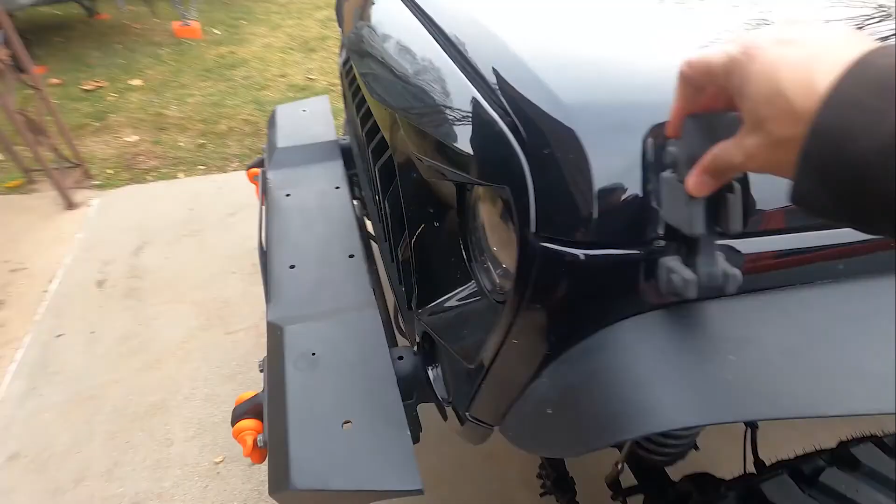All right, we're back. This time it's a little different. We're not in the freezing cold in the elements outside in the garage, especially since right outside my office here we got close to 8 or 12 inches of snow over the last 36 to 48 hours. I don't really want to be out there in the negative temperature right now, so we're inside the home office.

We're hammering through some details, and I need your help to make a decision. The decision we need to come up with is: do we want the airbox to be on the driver's side or the passenger side? I don't have a preference, I'll go either way. I'm not sure what option is best. I don't know the pros and cons to each one, or the element of work that goes into each one.

What I'll do in this video is lay it out for you, and I want your feedback. If you've done this before and found one way easier than the other, or if you're researching it yourself - a lot of people have reached out about the different elements and parts for this Hemi swap, and this also applies to the 5.7 because the 5.7 and 6.4 are extremely similar. I'm going to use some creative computer stuff to overlay my screen so I'm still a talking head in the corner. But I really just want advice. I don't know the option. I'm going to lay everything I know about the scenario out, and I'm leaning one direction, which we'll talk about at the end of the video. But let's get right into it.

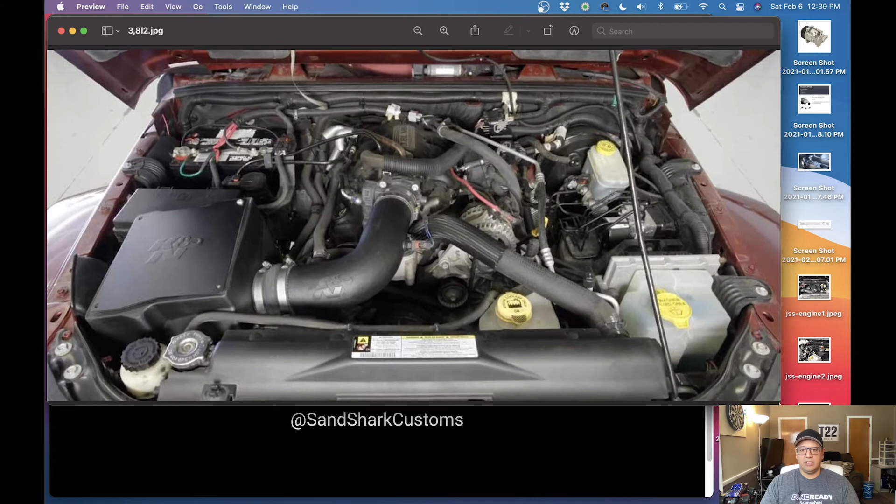All right, so let's first start with what the current 3.8 engine bay looks like. This is a current 3.8 engine bay that has an aftermarket K&N air filter intake. So let me get this set up to edit. We got the intake right here, the battery back here, the TIPM right there, the power steering fluid down there, the radiator across here, the overflow coolant bottle right there, the brake fluids right there, the computer that sits right here, and the windshield washer fluid right here. So bone stock 3.8 out of the 2007-2008 Jeep JK - it is on the passenger side where the airbox is.

So with that said, we know that in the new Hemi swap we really have two options. We have to relocate the washer box over here, and the overflow box most likely to this side, the passenger side, in order to get the airbox to sit over on the driver's side.

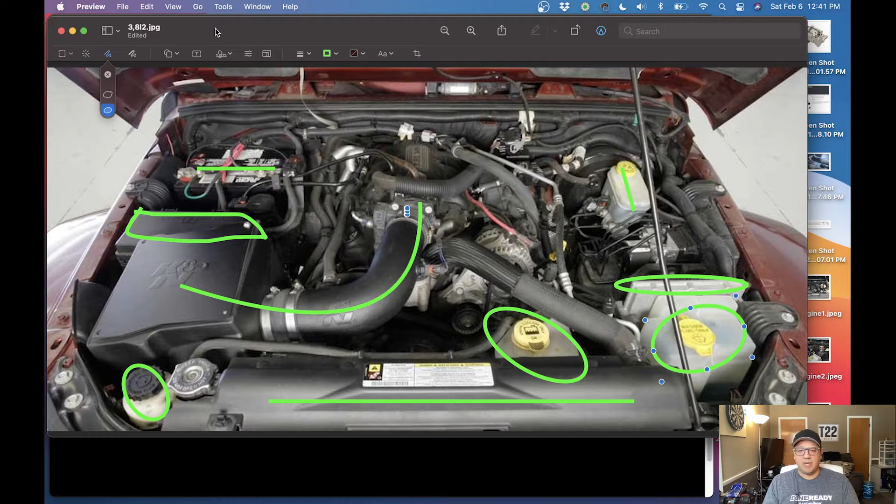All right, so let's go look at a couple of the swaps from other companies out there. We have AEV that does engine swaps, we got Jeep Speed Shop, we got America's Most Wanted, we got Dakota Customs - all these. And I'm sure there's other shops I just don't know about that you can get kits from. I would love to know other ones because I want to build out this resource. So if you know of other shops that do a DIY kit, I would love to know more about it so I can document it on our webpage. Throw it in the comments below, or message me on Facebook, or reach out on Instagram.

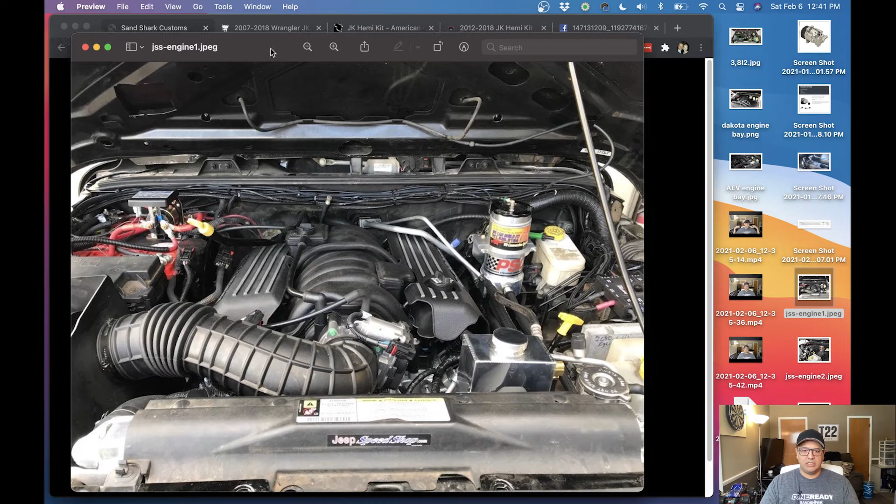All right, so let's go ahead and minimize this screen. Let's start with Jeep Speed Shop. So this is the engine bay of a swapped 6.4 Hemi in a JK. And we can see right here, let me get my marker out, that the airbox is over here on the passenger side.

Okay, so what is the difference here? We know that it probably has an aftermarket power steering pump or reservoir pump. I'm not very familiar with this setup, so I'm assuming that's the power steering. We have the overflow bottle right here, we have the computer, and I'm guessing right over here in the corner is the windshield washer fluid.

Now, what is different about this engine is the intake manifold. A stock intake manifold from an LX style 6.4 Hemi or 5.7, the front of the intake manifold comes out and shoots left, and then you have the throttle body right around this area. This, I believe, is a modified intake where you send them your intake as a core, and they modify the front to have it come straight out, so you can put the throttle body on it, and then this hose or pipe can come off the throttle body and go to the passenger side airbox area.

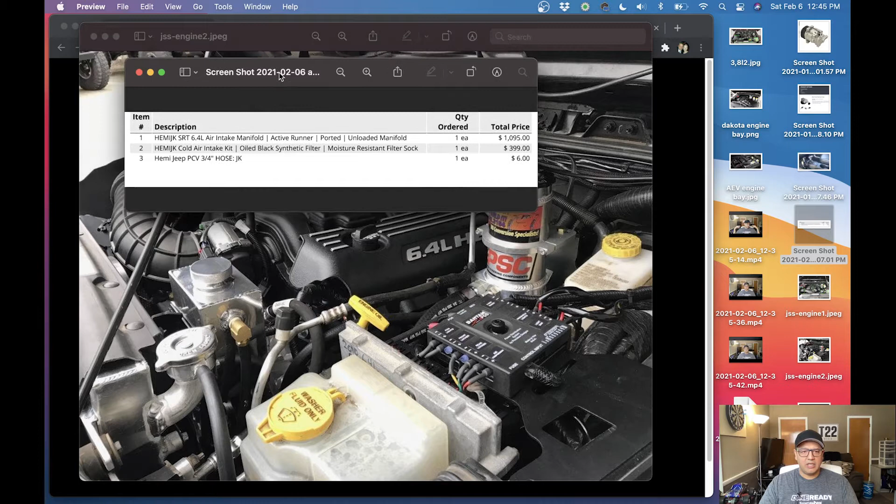And while we're talking about that, let's look at some numbers from America's Most Wanted. So I reached out to them, and they're right down the road from me. I'm in Grand Rapids, Michigan. They are just outside of Detroit, maybe a 2-hour drive from my house. I also learned that AEV, who also does Hemi parts, and I'm sure everybody's heard of AEV because they offer tons of stuff, is also just over in Detroit too. So it's kind of cool to have two big companies right in our neck of the woods.

So let's look at some of the pricing here. The challenge with keeping the airbox on the passenger side is that you have to have a modified manifold, and that is a little bit of a scary price tag. You can see right here from America's Most Wanted, they want almost $1,100 for a new manifold. I don't know if that's reduced with the core charge of the manifold you have or what, but man, that's another $1,000 price tag just for an intake manifold that you may already have with the engine you bought.

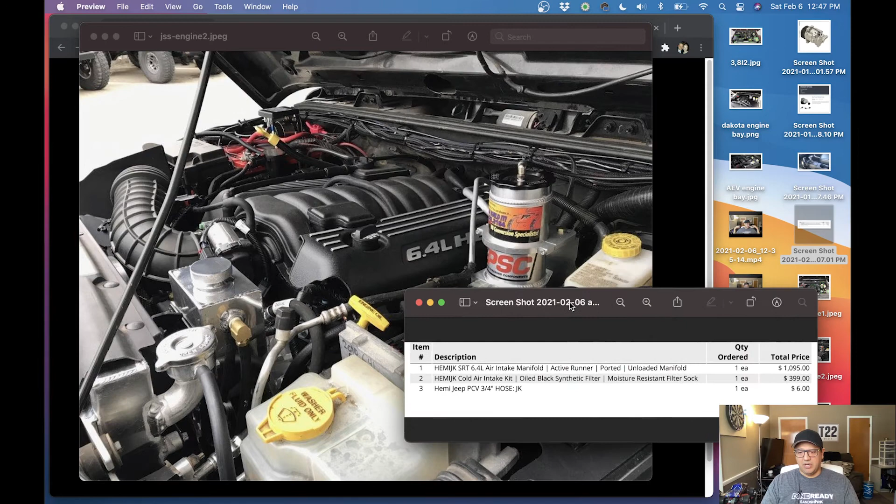And then from there, you can see that we have the cold air intake. That's basically just the filter, the actual air box, and then the tube that connects up to the line. And they also threw in that I would need a PCV hose to make sure everything's connected up properly. But man, that's a pretty hefty price tag to do the intake manifold modification. So let's keep that on the back burner. I know I don't necessarily want to dump that kind of money on there if there's another option.

So let's go over what that other option is. What we can do here is minimize this.

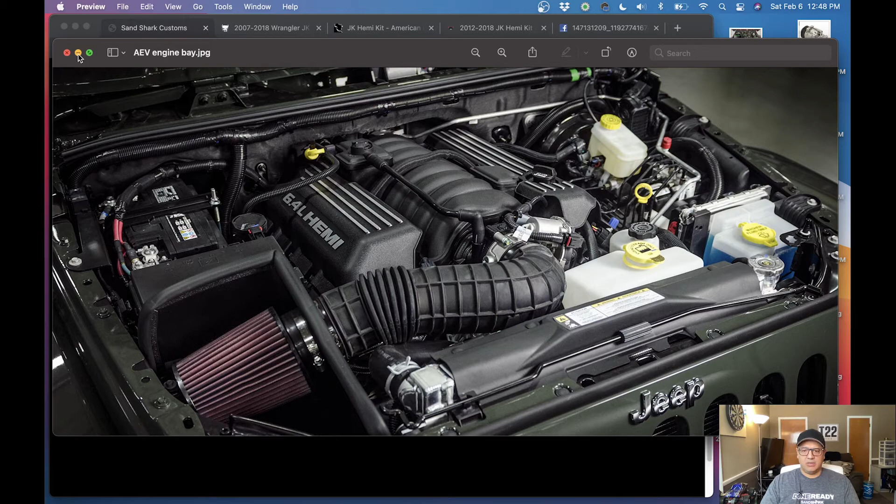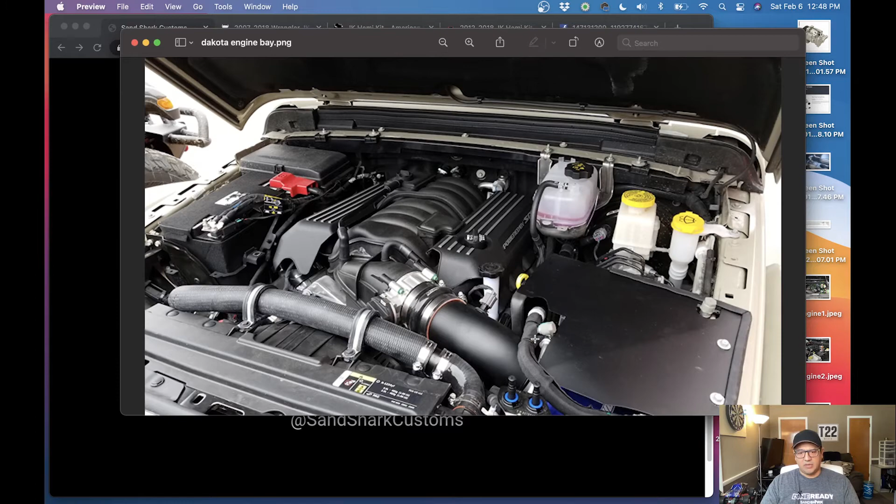All right, let's go ahead and close this out and let's bring up Dakota Customs. There we go. All right, so here's an example of Dakota Customs. They offer in their kit the ability to continue to use, and this is where you can see right here.

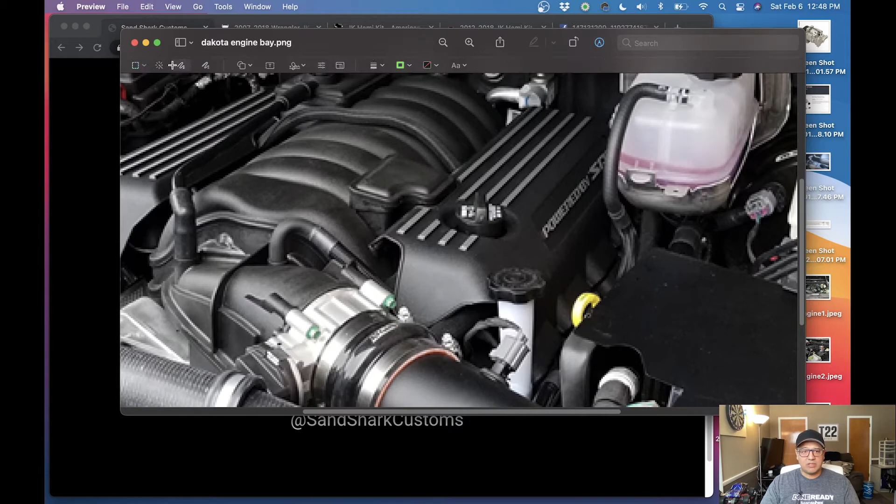Let me get some markers out here. This is a stock intake where you can see that it comes out and shoots to the driver's side, and then this is just a stock intake throttle body. So with that said, what does it take to actually move the elements that were over here on the driver's side over to the passenger side? And I don't fully know the answer to that. I'm trying to just talk through it and get feedback from you because I do want to know the answer to this.

There's also a question about performance. So with the intake manifold, if you chop off this bend that you see right here, is there a performance hit or is there a performance gain? I don't know the answer to that. If you know it, please let me know. That could help curve the decision. If we lose, say, 40 horse or 25 horse or something like that, just by modifying this and sending it off to the passenger side, I may not choose to do that. So yeah, I just need to know the data to be able to make that decision.

So let's look at this picture where stuff got moved to. We know that when we're ordering parts for the 6.4, we need a power steering pump to go onto it, because that's the only way that we can get the power steering pressure for the Jeep JK setup.

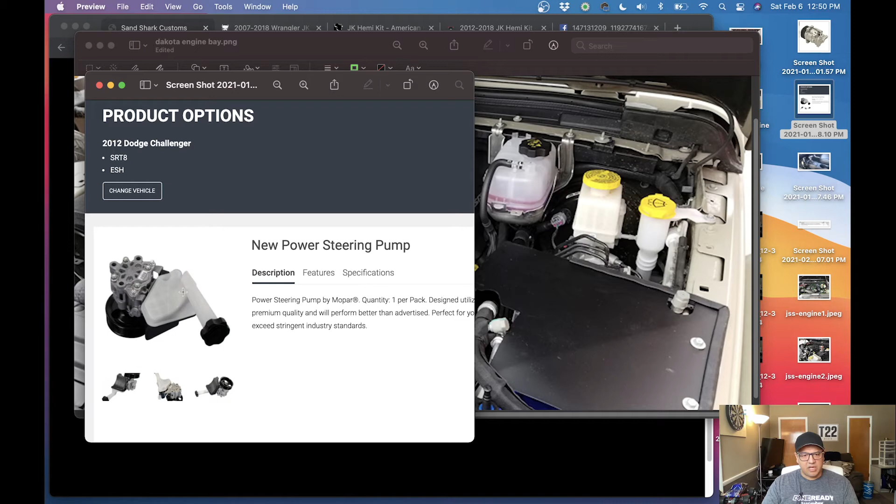So let me bring up the power steering pump that I went with, and you can see that it has the reservoir connected right to it. We can see in this picture it is sitting right here. That is the power steering reservoir. So we don't got to worry about that because that's just attached right there and it fits nicely.

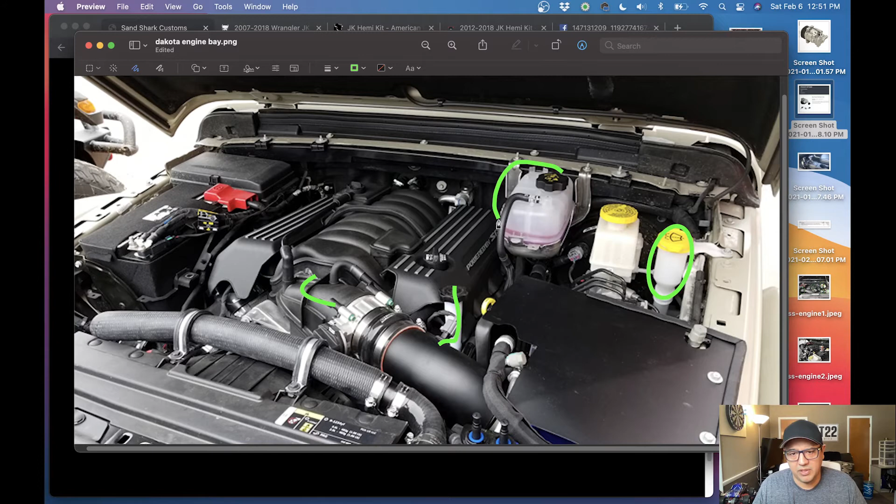So then we know we have the, let me zoom out here just a little bit, the windshield washer fluid issue, which they moved right here. And we have the coolant overflow, which they built a bracket that holds it right towards the back to the firewall. Now, obviously, we would have to get extended tubing to make that distance from the radiator back to there. But hey, it's a good location.

We'll notice also that looks like we have a little open space up in front of the battery. Now, looking at this setup, they actually put the TIPM back here, fuse box TIPM, whatever you want to call it, and the battery in front of it. Now the Jeep Speed Shop kit that I went with actually has the dual battery in the back and then the TIPM in the front.

So that's that setup. All right, so then we have the air box fitting in right here with the simple tube that connects up the stock direction to the driver's side. Awesome. And we'll notice in this picture too, one of the radiator lines goes up over the fan shroud. I gotta learn a little bit more about that.

So let's look at this air box and what does it cost to do this setup. I reached out to Dakota Customs and they provided some information on that. Let's go ahead and... whoop, I don't know where it went to. Just a moment here.

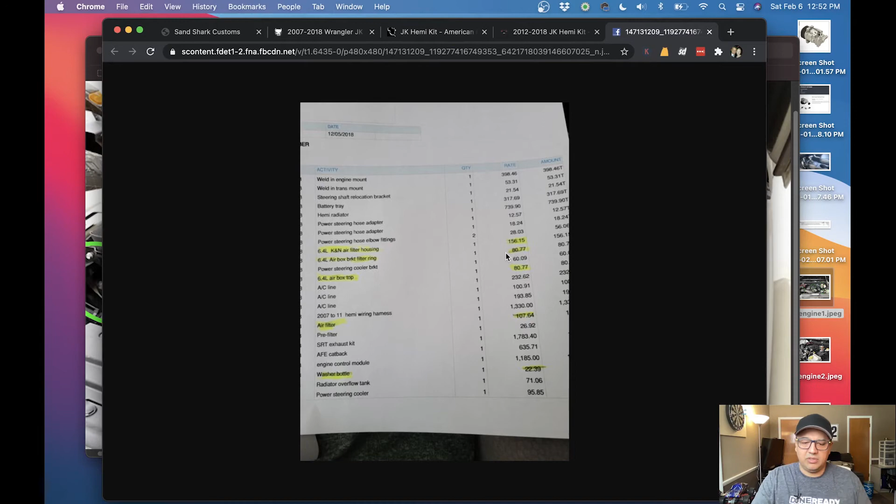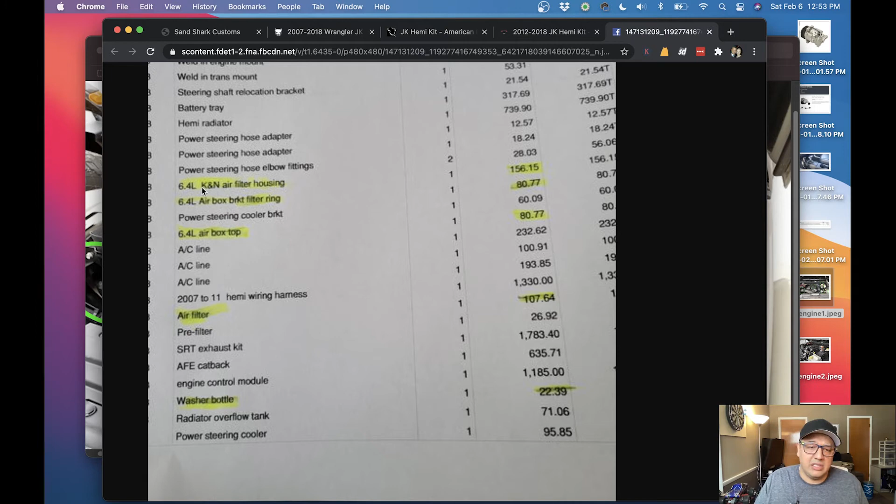Okay, here we go, we got it back up. Let me zoom in on this just a little bit here. Okay, so this is actually their kit price list, but he actually broke down what I would need to essentially keep the stock intake manifold that shoots it off to the driver's side. Keep that. So let's look at this. He says we'll need a K&N air filter housing, which I'm just gonna guess is the box, right? Air box right here, and then the air box filter ring. Not 100% sure what that is.

It may be the tube and the connector to the throttle body. Not 100% sure if that's what it is, but we'll find that out a little bit more. And if you know the answer, please let me know.

We need the airbox top, air filter, and then the washer bottle. Now, the washer bottle, which is right back here, for this time being, I'm not going to worry about the washer fluid at this second. I want to get the vehicle running, and I don't need washer fluid right at the moment. So let's just keep going with this.

So what I'm thinking is, looking at this price tag, I'm sure I can hunt down an air filter for a better price than 107. Granted, that is, if I buy it from him, I just know everything connects and everything works.

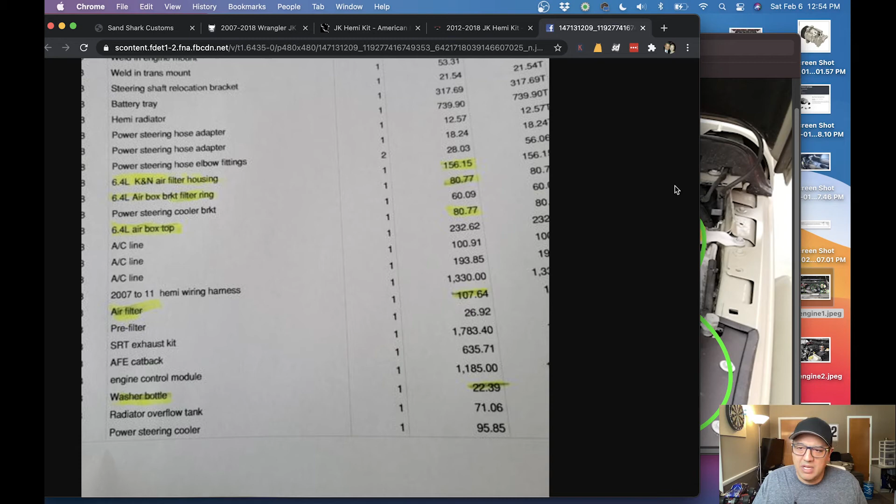The airbox top, I'm not 100% sure if I need the airbox top yet. And I say that because a lot of times you don't even see it, you just see the filter right in there, you don't really have a top on there. Now, I am sure that this top probably helps direct the airflow in from a colder area to get cooler air into the engine. So we're gonna research that just a little bit here, and then yeah, that's about it.

The rest is really just getting different extender hoses to route to the different locations. Now I do know that this must be a custom air overflow bottle right here. So I'll have to do a little research into that.

Now I did get an overflow bottle with the JSS kit, which is actually this one right here, the metal one. So I'm gonna, maybe there's a bracket that I can put back here that will just fit, or move the overflow bottle over onto the left side, since I believe that we have some extra space to work with over there. Oh man, so many decisions.

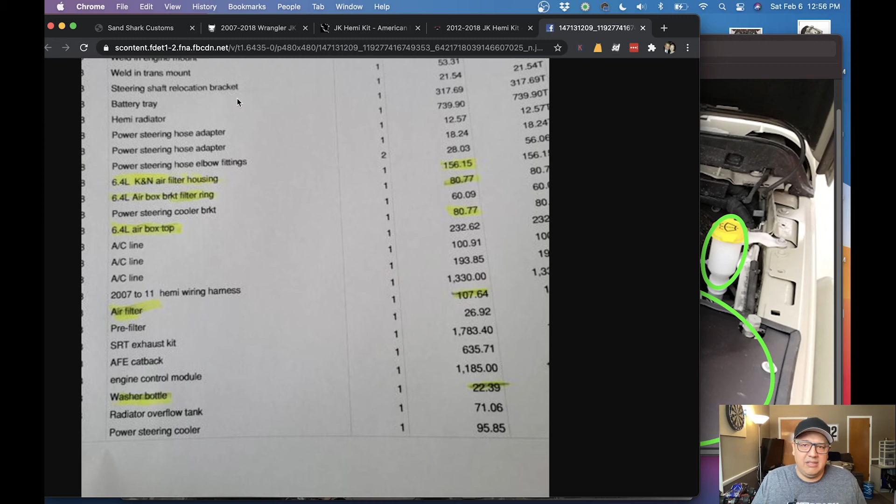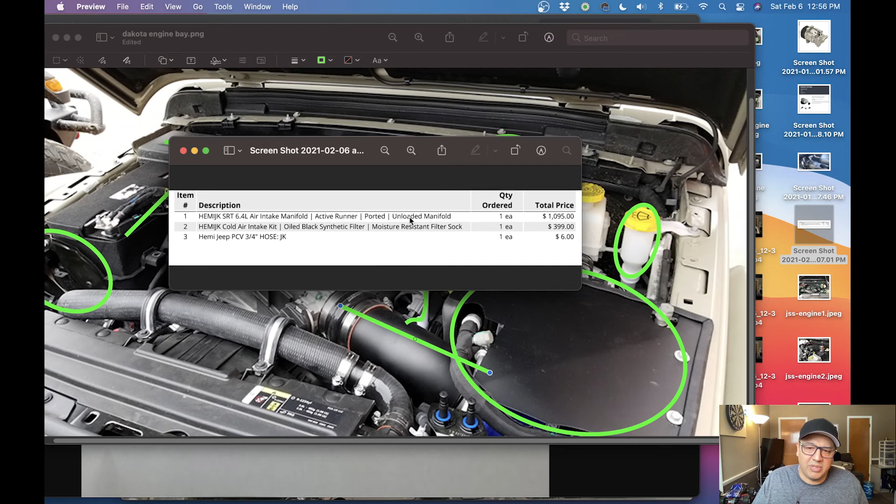But man, that seems like a much better price than going with the intake manifold, which we can see right here. This is just one, maybe we can get it cheaper other places, but from America's Most Wanted, I mean, $1,100 to have the new intake just to allow us to buy another $400 cold air intake that brings it off to the passenger side. Oh, crazy.

So many options. All right, so what I am going to do is I want to make sure I document both of them. So on the projects on the website, I'm going to make a whole section that's dedicated to both options. Now, I'm leaning, after telling you the pricing, I'm leaning to the Dakota Customs setup.

Because it only makes sense that if this is all that we need, maybe I just pick up the washer bottle anyways, just so I have it. It's only $22, and these might be older prices, so the prices might go up just a little bit, but yeah, I just might get it so I don't have to worry about it, and then I can figure out the rest as we go.

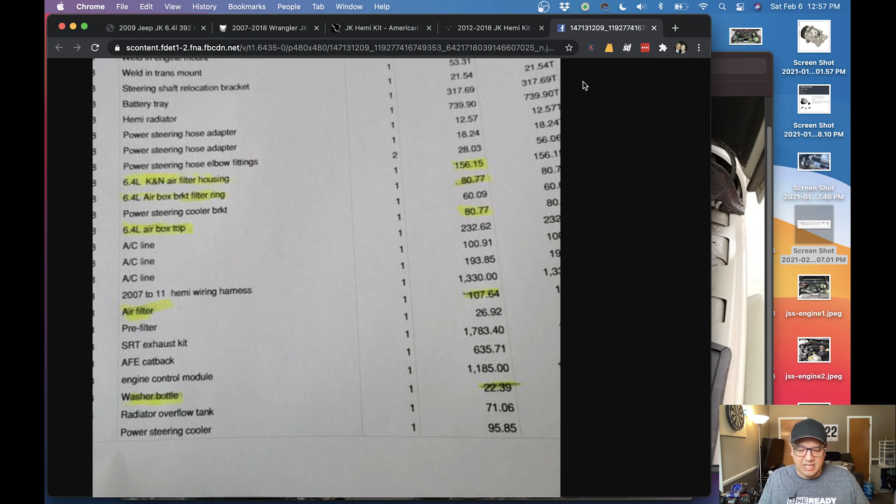But I'm gonna keep creating videos on it, and yeah, I want to know what you guys know. If you've already made your decision on what you're gonna do, the pros and cons, the ideas that you've come up with to solve the different problems, I would definitely love to know.

So with that said, I think that's all I'm gonna do for this video. Let me switch back to full screen here. So yeah, I hope you enjoyed this video. I hope you can help provide some feedback to me so we can help make a final decision here. I'm posting this the day that I did this, and I hope you like this format too. I'm just brain dumping everything I can think of that has to deal with both sides and the decision-making process and the research process that I do to actually make these decisions.